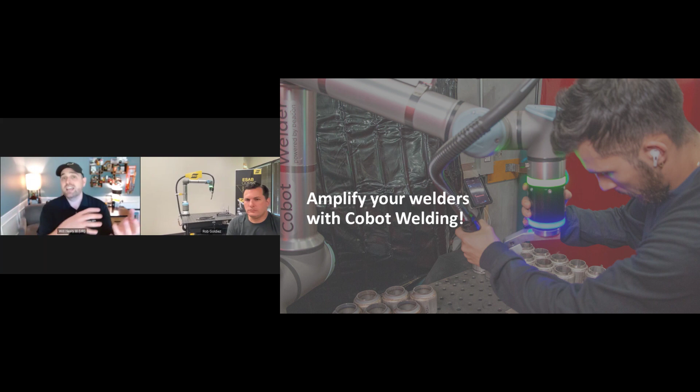So what can we do to beat this kind of chaos in production welding - from not having enough people and having to turn away business, the job being pretty physical and challenging, and just having shortages in total? It really comes down to, how can you amplify your welders? And you can do it with Cobot Welding. Cobot Welding has this really interesting opportunity as a tool for welders to boost their productivity, and to help focus them on work that they want to do.

Welders want to solve problems. They want to do creative things. And those 200 straight-line 6-inch welds, those are things that a cobot does very well. That allows your welder to focus on prepping the next part, doing a quality inspection, or doing a more complex weld that maybe you want the welder doing, while the cobot does some of the other welds that are more boring. This can amplify the welders in their productivity. It can boost the consistency of how many parts you make per shift. There's a lot of opportunities for how we can do that with collaborative welding.

So what is in a solution? We're going to show you, and Rob's going to demonstrate live for you in a couple minutes, what the Hirebotics collaborative welding system looks like and how it works. But there are basically four main components inside a system to make it work: the cobots, the universal robot you see there; the work area where it's going to work, along with the tooling and fixtures required to make that happen; and then the dress-out kit with the torch, the pipe, the wire feeder, the power source, and all those kinds of pieces to make the robot into a welder.

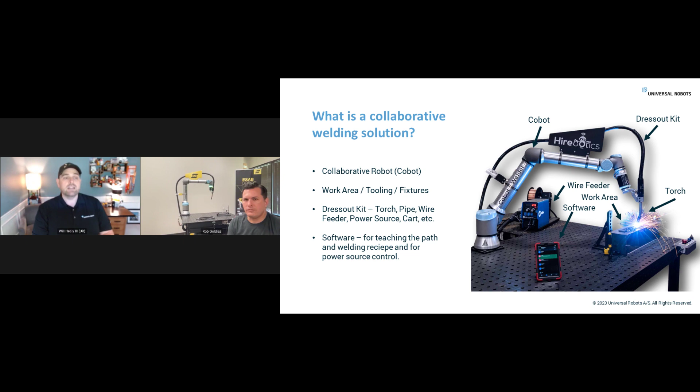When we look at what collaborative welding is doing, it's a valuable tool that's amplifying your welders and expanding their productivity. We see time and time again, it raises the arc time per shift 2x, 4x, 10x. We have some case studies we're going to talk about in a minute.

We drive production consistency, improving the product quality, reducing the grinding and rework queues. No one shows up to work thinking, I want to grind parts today. And then, transferring those dull repetitive tasks to the cobot, making it more predictable for you.

And this is really valuable - it increases welder engagement and retention, and we see that a lot in the stories. It reduces the physical demands, reduces the exposure to hazards like smoke and fumes coming out of the welding process, and it focuses the welder on the creative and challenging tasks, keeping them more engaged. That's going to help you retain more welders.

We've always embraced new tools in work. Look at anybody who's assembled an IKEA system. If you're using a little wrench, that's really torturous. When you have to put together 200 screws by hand with a little wrench, you get calluses on your fingers and you're just really tired and it's draining.

So we have screwdrivers, torque guns, and Ethernet controllable torque guns - we've invested in technology over time in our processes to make it easier for the worker, to make the worker more efficient, to help the quality of the installation and get the right torque rating on the assembly. We have always embraced new tools in work, and this is a new tool for you to really amplify your welders and help them be more productive and drive engagement with them.

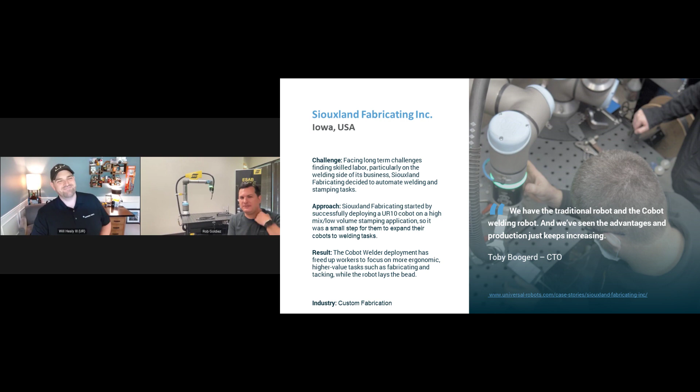Yeah, and for them too, floor space is always a constraint in any manufacturing facility. Their parts are tabletop size, maybe a little bit bigger, but if you're trying to do those parts on traditional robots, you've got a lot of floor space, a lot of caging and things like that to deal with. You can fit a lot more collaborative systems into the same floor space that you can fit a traditional system. Oh, great point, I didn't even think of that.

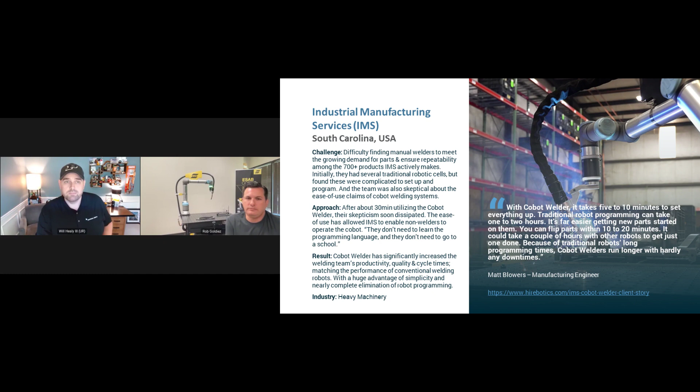Okay, Athena Manufacturing out of Texas. Yep, Athena Manufacturing down in Austin, Texas. They supply into a lot of different industries, but the semiconductor industry is one of their big ones. And the semiconductor industry, as we all know with the CHIPS Act and stuff like that, with the reshoring, has driven a ton of capital investment into establishing these fab sites in the US. So Athena's business has been growing.

They have traditional robots doing traditional welding and sanding and other applications. They even have cobots doing other applications. But when it comes to welding and the effort to get welding productive, having a partner that has software that makes it easy to use was key.

So Athena, another customer, they started with one. They started to bid on more jobs and more opportunities beyond what their single cobot could do. Now they have 4 systems. They have external positioners that they've helped design and incorporate into the system to do very large parts with 2 robots, and a lot of smaller parts as well.

This is a great example of they were turning away business because they didn't have enough welders and they weren't able to do it. And what I really thought was interesting is because of how easy the solution is, they were able to take people who didn't even know welding, that didn't know how to use a robot, and teach them as operators to operate the system and produce parts. So they were able to actually make more parts and accept more business because of this investment. And I thought that was really interesting.

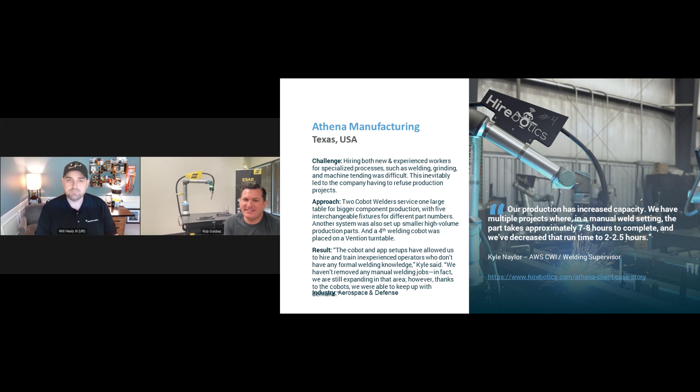And so as companies globally evaluate how do they solve their labor challenges, cobot welding continues to pop up. And our strong belief is that ease of use will drive the day, because a lot of these customers are first-time automation users, and first-time automation users are trying to de-risk what their investment is.

And the best way to do that is through an easy-to-use system. You're going to see in a few minutes, as Will mentioned, I'm going to share a screen, and we're going to teach some parts so you can see how easy it is. Everybody throws around ease of use. It's very easy to just say, oh, we've got an easy-to-use system. Traditional robot companies do it, and then you watch videos, and it's very complicated. Very few companies actually show you what it takes to set up a part, go through the process of teaching it, tweaking it, and we're going to do that today.

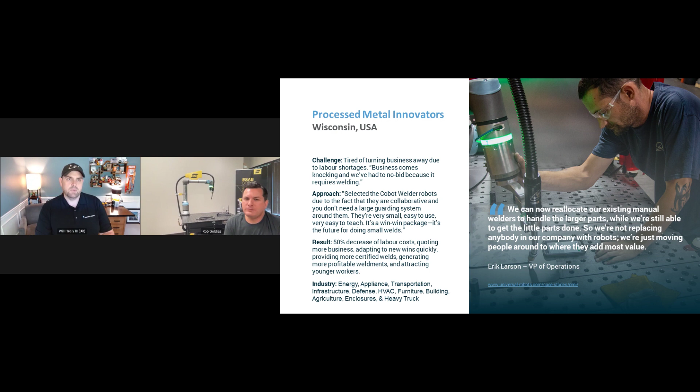Skyvington is a great case study with our partners at ESAB. It's a Canadian company, and they were looking into Cobot welding. They struggled. The story for all of these is the same: we cannot find people to weld the parts we need to weld, we cannot find and keep skilled welders. That's where it starts, that's the entry point, and they get all these other benefits. Skyvington was literally tens of thousands of parts behind on a job they were doing for one of their customers. When they got introduced to the ESAB Cobot, the version of our system you see behind me, they literally took it that day. They asked for that demo system, and the next day it showed up on their site. It wasn't the one they were buying, but they said, I need this. Over the course of that next 30 days, they produced all the parts they needed. They got caught up on a job they were prepared to tell their customer they were behind on. They're just emphatically happy and love it, how productive, how easy it was for them to be productive so quickly. I think that's a great story.

And the weld quality is going to be important to folks like this because they're making retail displays and store fixtures. So these are things that are going out in the commercial space where people in society are seeing it, and so the look is going to matter on those kinds of products. I'm sure that got them excited too, that the quality was going to be there that they were looking for.

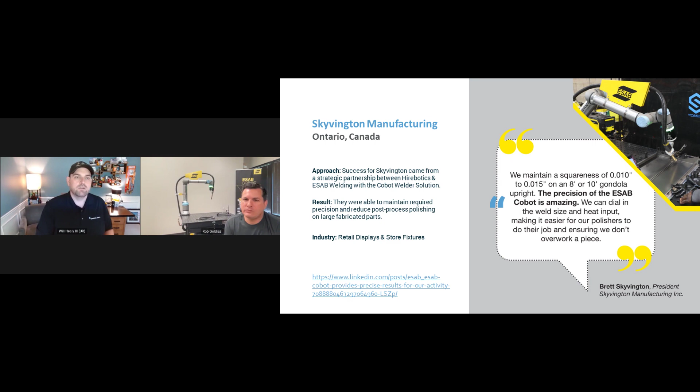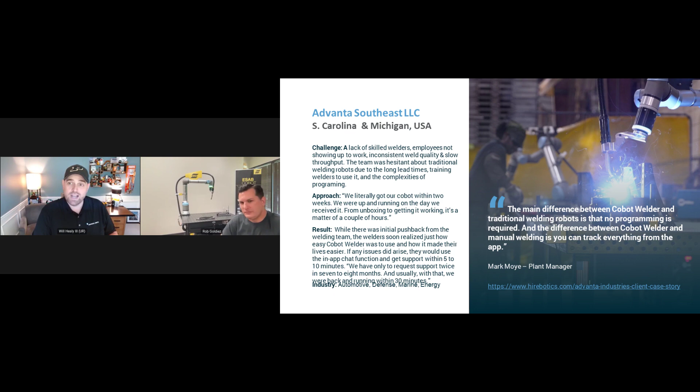Thanks, Will. One of the things I want to say - Will's presentation led up to this - this shortage of skilled welders has been going on for a long time. I remember a 1998 American Welding Society study that highlighted one of the concerns manufacturers had in the 90s was the shortage of skilled welders, the aging workforce, all the same themes. I point this out only because robots have been around for a long time. Cobots are newer to the scene, but these problems haven't been solved. The traditional method of solving these problems hasn't worked - the problem exists today and it's only gotten worse.

So what you're going to see here - I'm going to share the screen so you can watch what I'm doing. You're going to see me teach some parts. We've got a little sample over here where we'll do a live demo. Most of the time we don't even weld in these demos, because people understand that with ESAB or Miller or whatever power source they get with our system, they know how to join metal. This is really a story about how easy the software is to use and can I empower my people with it. It's one thing to watch a video on YouTube of a robot doing something, but the real story is how did you make it do that? How did the software enable someone to do that? So we're going to walk through that now.

Okay, hopefully you can see my video - I'm going to share a tablet that I have. Just as a quick background, our software, we develop it in-house. It runs on iOS devices - I've got an iPad mini here, Android, web. You bring your own technology, whatever your welders are comfortable with. This is the first layer of breaking down the barriers.

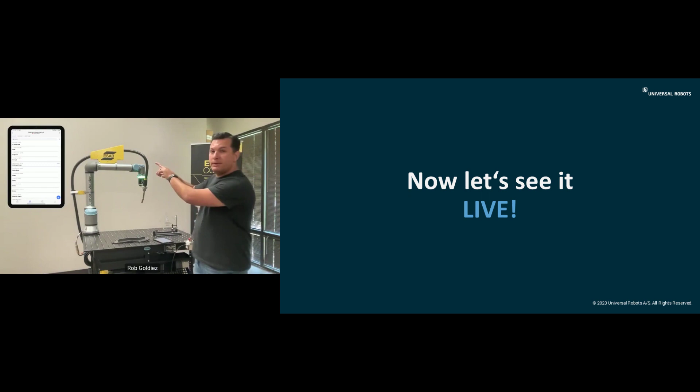A few things I'll point out as I run through this demo. Across the bottom we can see a few different tabs. I've got a home tab. Customers can see these are on some demo robots, but they can create their own charts and chart cycle time and consumables used, and all sorts of things like that, whatever's important to them. We're looking at this on an iPad, but some customers put a big screen up in their shop. Maybe the owner wants to monitor things from home. They've got the flexibility to do that.

We're going to spend our time on the robot tab, where we have several different robots here. We're using the ESAB demo, so I'm going into that screen right now to see all the different parts that we taught. We're going to teach a new part here.

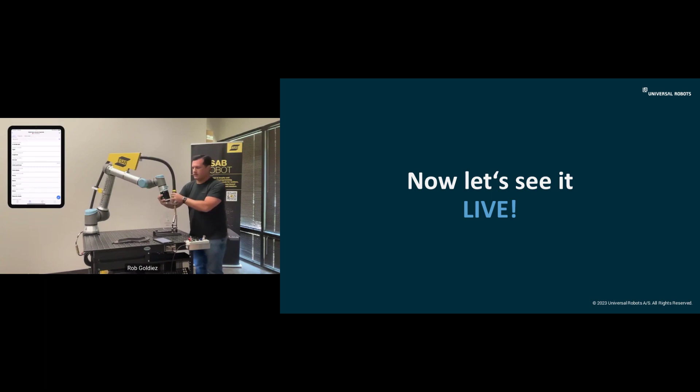A few things I'll point out, especially if you're new to collaborative robots. This is safe to be around. I can walk up to it. I can move the robot around by pressing a button on the back side of what we call the puck. There are two buttons here. The top one, when I press it, allows me to hand guide the robot. So welders could do the same thing I'm doing and move the robot into position.

And the bottom button is going to interact with the software. All motion is always initiated from this button box, or operator box, that's wired into the robot with an e-stop, a play button, and an arc on/off switch. So we're just going to go through and teach a part that I've got set up like this. It's got a few different pieces of geometry to it, and we'll go through and teach it.

So I'm going to hit the blue circle button in the bottom right. I'm going to give this part a name. This is typically the hardest part of the demo — what do I call this part? But a customer would give it a part number or drawing number, something they'd want to recall it by later. We'll just call it webinar.

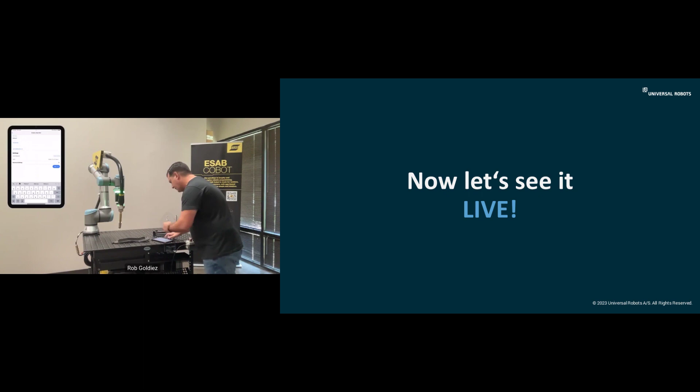I'm using the 22-degree short gooseneck, so I set that up. Now, if a customer has saved weld procedures into a library, you can easily pick some settings from a library. I'll just say use these settings — those are my defaults. And now we're ready to teach welds.

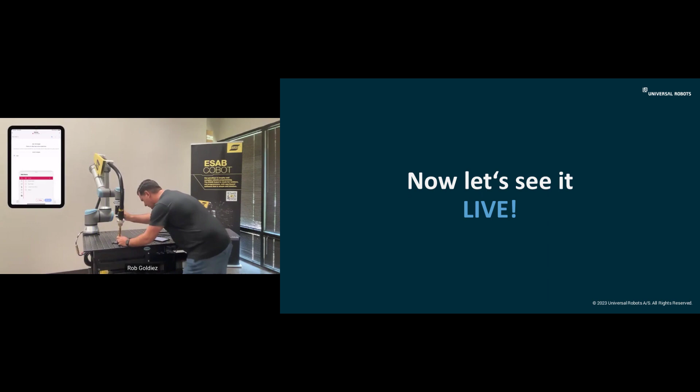Now the data shows that most people are teaching linear welds and air moves, so we prompt the user to start with linear welds. You can always change it to a different type of motion. But we're now going to hit the button and bring the robot into position, and click the blue button to teach our first point.

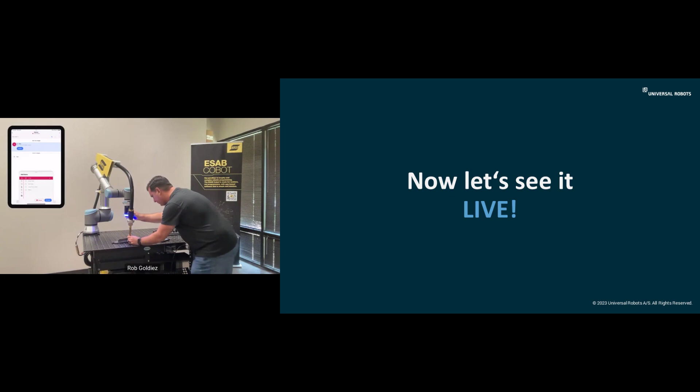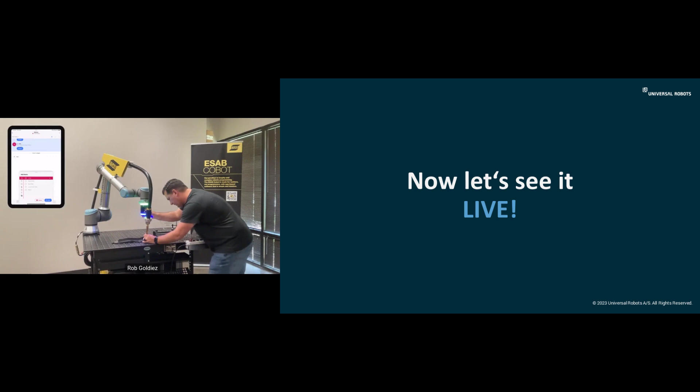So I just taught my first linear weld just by clicking that blue button. I'm going to move it to the next point, click the blue button to teach my next position. I'm going to move it to the bottom here, teach my next position, and then the last point here. Now I haven't taught any air moves, I haven't taught approach points — the software figures all that out on its own. We can always add that later if we need to, but I'm going to hit save.

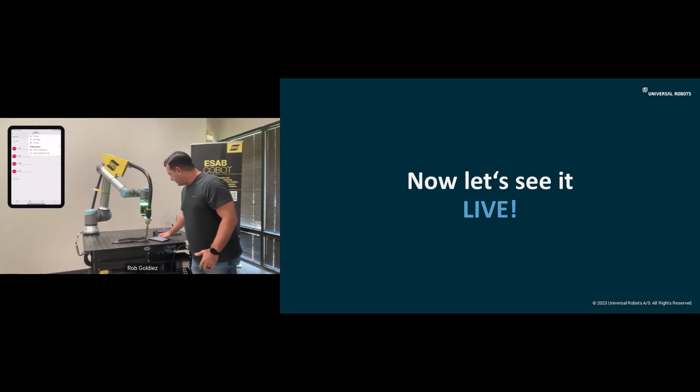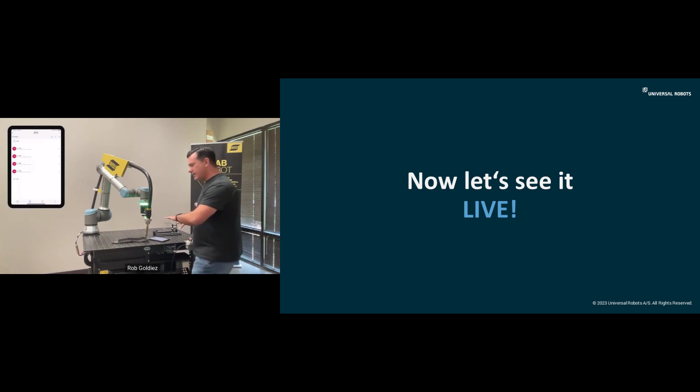Now, similar to Apple Music and Spotify, we have a concept called a playlist. What's on the playlist is what the robot's going to run when we press play. You can have one part on your playlist like I just taught here, and I'm going to create a playlist with this part. But you can teach parts independently, throw them onto a playlist just like songs in a music app, and run different parts sequentially — an A side, B side, or three different parts if you want. So we've taught this to run, we told the robot we want to run it. The arc is off, we're not trying to weld this part here. I'm going to press play, and we'll see it cycle through this.

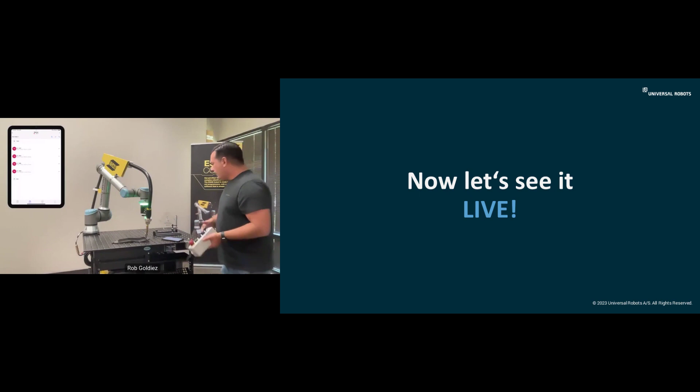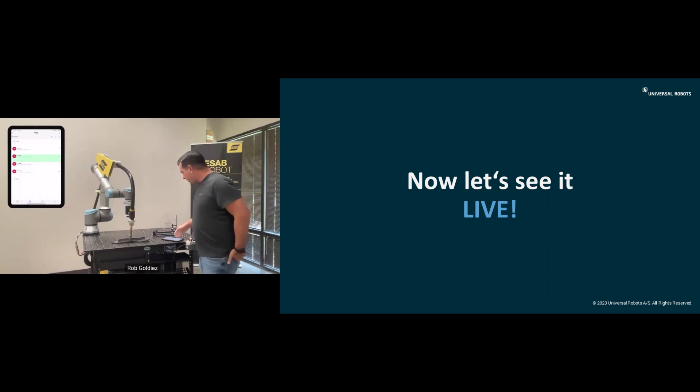Now the speed at which it's traveling, the torch angles that I gave it, are all what I kind of hand guided it to. The travel speed is in those settings that I had when I chose that library setting. And it's going through the different points right now, which we can follow along in the software. Now, as it's going through that, I'll point out a few different things in the interest of time.

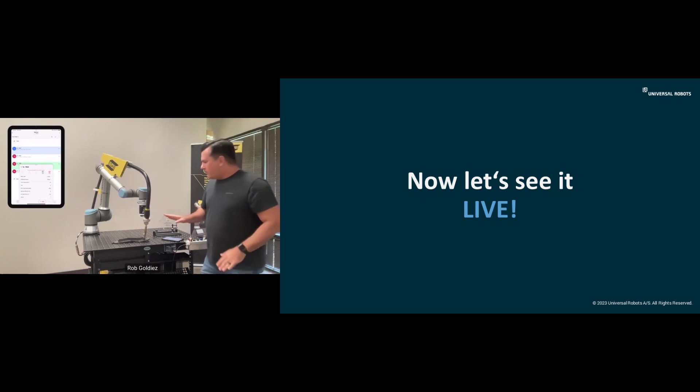On any of these points, we can tap on it and see the weld procedure for those points. We're in a pulse process. We've got a 22 inch per minute travel speed. Trim is set to 0, wire feed speed 400. For any taught point, we can go through and tweak those settings.

Now it departed the weld and went to its default home position. I can make this more sophisticated by tapping the magic wand, hitting plus to teach some more points at the end.

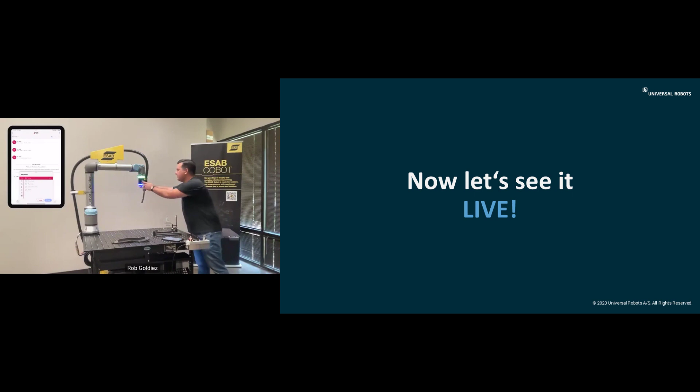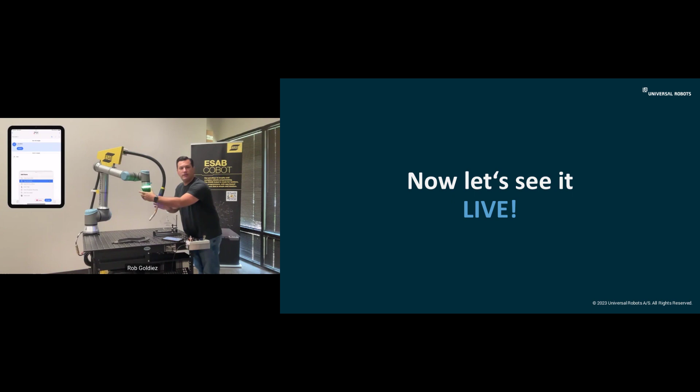Maybe I need to have an air move here because I need to weld the backside of the part next. So I can switch to air move just by pressing and holding the blue button. It lets me toggle the air move, and we just taught an air move. I can toggle back and teach points on the backside.

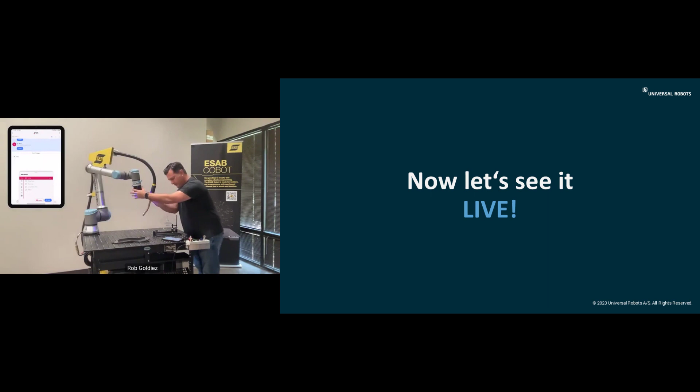We'll just do that for now, and we'll hit save. So very easily, I can add to my part. I can teach a much more complicated part.

I can press and hold one of the icons because I want to skip part of the weld and just have it go from there. Go to the air move and do the backside. Notice again, it'll depart the weld and go to its home position. So very easy to interact with this.

We're running this on an iPad and it's going to go home. So now I'll answer the question that people always ask: I got to see it weld, I got to see it spark. So we're going to teach a little part over here.

We've got just a little lap joint. So I'm going to go back and teach a new part. We'll see how I do here. I'll say webinar 2. Hit next, choose those same settings.

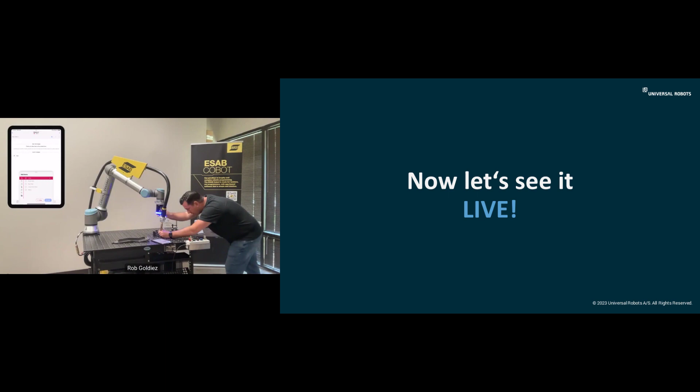So now I'm going to come in here. I will teach my first point. I'll come over and teach my second point. We can do a dry run if we want to see it again.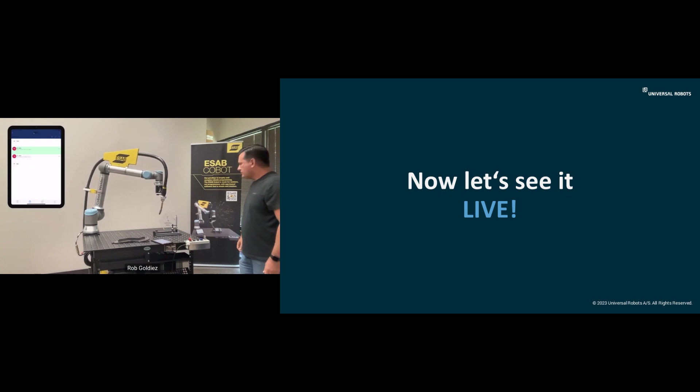We can even do something we call step mode. So if we want to go step by step, it stops at the points and I can look at where the torch is. If I wanted to make any changes, I can move the robot around from this point. I could recapture that point if I needed to make any adjustment, but if I'm happy with it, I can play it through step by step.

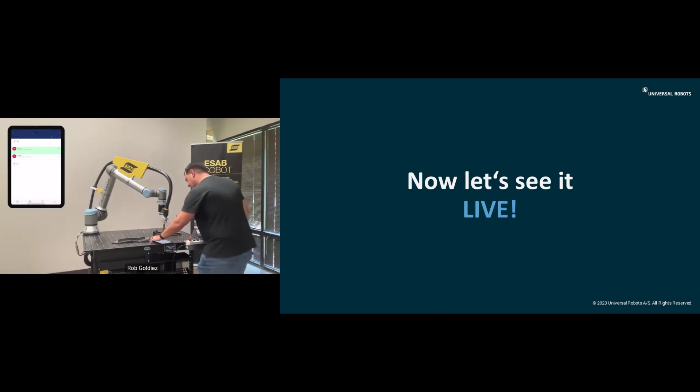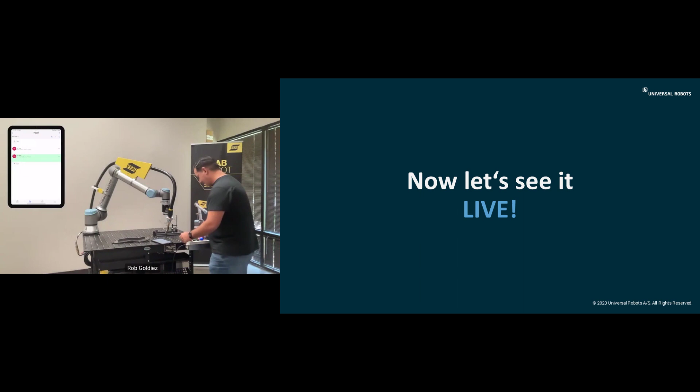But we want to see it weld, because people want to see: can the welding cobots join material? They can, I promise. It'll go home. So now I'm going to move out of the way, get into a safe area behind a screen. I've got the operator box over here. I'm going to turn the key switch on.

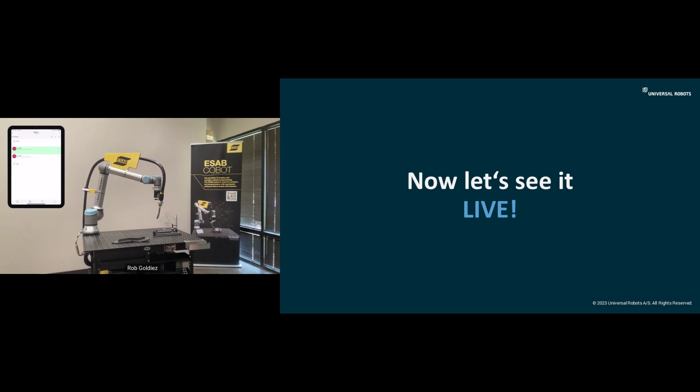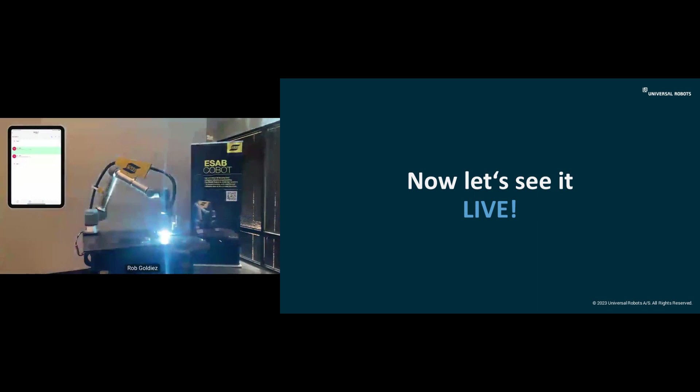And we're going to hit the play button to see it weld. So pretty easy to run the system.

A few other things I'll point out real quick, and then we'll get to some Q&A. I mentioned this earlier: customers sometimes have questions, they want to reach out. Different than any other system out there, they can drag it open to the side.

They can hit support. Within support, can we see this? I think we can see this. I can see it now. In there, we can search knowledge articles, and we can reach out and ask questions by sending a message in.

We're really proud of this, but if you have any questions, you can reach out, and in under 2 minutes you're going to hear from us. So very fast response time when you have questions and want to reach out to a human and get some answers. So with that, Will, we can open it up to questions.

Thanks for that demo, Rob. That was really amazing. I think what's incredible is how quickly you taught two parts with three different paths in like 14 minutes, more or less. And you were actually live welding a part there. I think the power of this is being able to go through and set that up, and if you have consistent standard setups that you normally use, certain speeds and gas mixtures, you can have all those preloaded there, so it's even faster. That's what you were showing at the beginning.

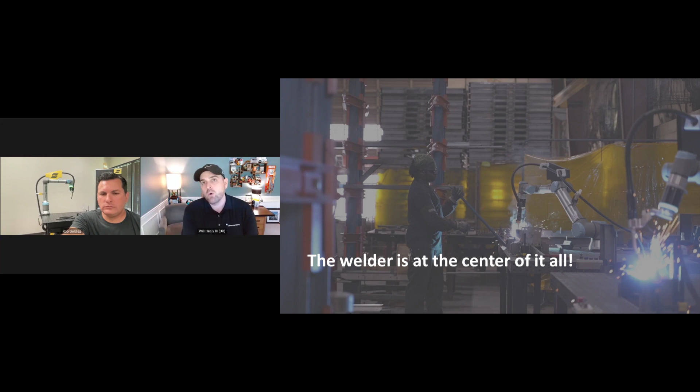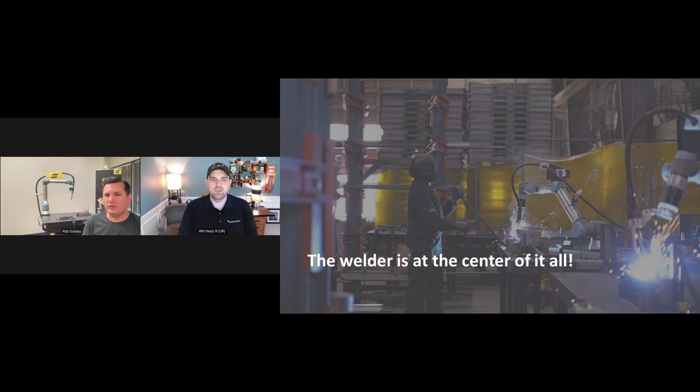I love this picture here. I forget which company this is from, Rob, but this is one person operating two robots at the same time. That's Advanta, two of their systems, one of their welders. No experience with automation, but he can load and go on multiple systems. That is awesome, really powerful. I think that's a really powerful part of this, it's enabling that welder to run two arcs at the same time. How many welders can hold two torches at the same time and do welds, and what's the quality of those welds when they do it?

When we talk to experienced welders, when we interview them, one of the biggest things I hear is this extends their career. People who are so tired and exhausted, they don't think they can do it anymore. You still need welders, but you don't want them to retire. This is an investment to keep them around for three, five, ten more years because they don't have to do the physical parts of the job. It can help extend their careers, push out their retirements a little bit, and help you keep your productivity levels without losing that welder because they can't do the physical parts of the job anymore.

Experienced welders tell us things like it gives them more energy and better work-life balance. It produces at their quality expectations and what they expect to be done, and it's their work when they're teaching the robot to do this. It allows them to focus on more creative and more challenging work, not just doing 200 pieces of a 6-inch straight line weld.

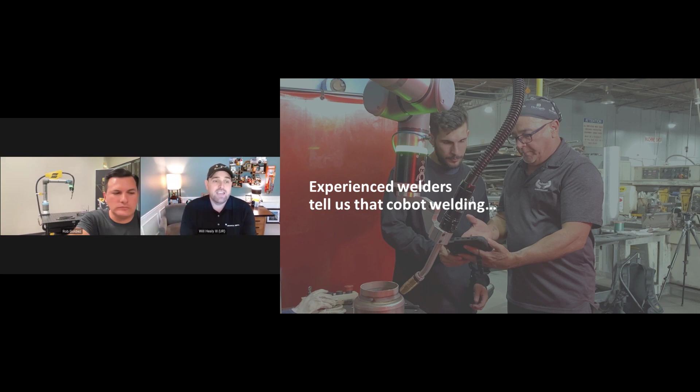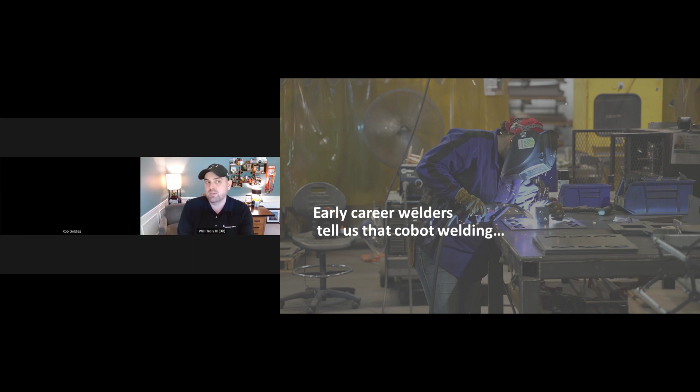When we talk to early career welders, people new to welding, this stops all the mindless welds, those 200 pieces or 2,000 pieces of a 6-inch straight line. Young welders usually get the less interesting jobs, so it gets rid of that kind of mindless work. They also aren't doing as much over-welding, so they don't have to do as much grinding. It empowers them to feel like they're contributing more to the organization and responsible for more. I run robots, I run welding robots, and I teach welding robots. It allows them to have that feel of more responsibility that young people are always looking for in organizations.

When we talk to business leaders, there's lots of interesting things they tell us: reducing the impact of the skill shortage, better planning of production levels, being more consistent day to day, and knowing how much arc time they'll have each day. It reduces operator fatigue and potential chances for injury, and it reduces waste, which is a big deal, and eliminates post-weld grinding. No one wants to grind anything, so if there's an opportunity to reduce or eliminate that, it's there. Business leaders go on to tell us all kinds of things, like it removes bottlenecks.

A lot of times the weld shop is the bottleneck, or it fills gaps where they have traditional robots, they have manual welding, but sometimes it doesn't make sense to set up on the traditional robot, and they wish they had something better than having a manual welder weld 2,000 of the same parts. It fits that really nice gap.

We hear over and over again that this implements really fast with a strong return on investment calculation at an affordable price for shops of all sizes. Ultimately, it enables you to be productive even when you have open welder positions, and all of us have open welder positions right now, and it helps your company boost productivity and profitability.

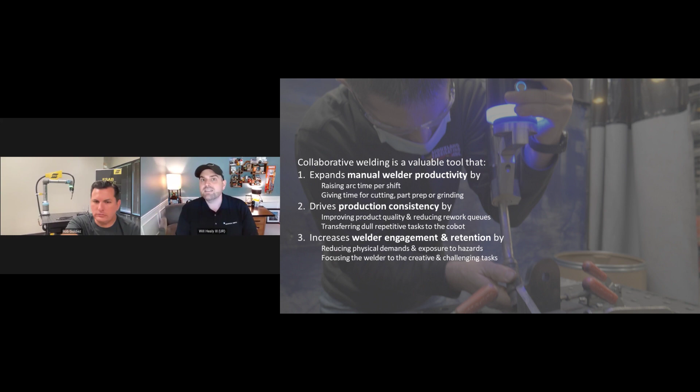So just a refresher, collaborative welding is a tool augmenting your welders that expands manual welder productivity. It raises the arc time, drives production consistency and predictability of the weld shop output, as well as the quality of the welds, and it increases welder engagement and retention, even attracting welders to your shop.

And so Hirebotics, Rob's with Hirebotics, is really trying to make welding cobots easy, so you don't need experts, you don't need robotics people to do it. They are the industry's first welding cobot with this intuitive smartphone and tablet app that you saw today.

Really cool. And they make a commitment on their site: industrial grade welding cobot systems shipped within 2 weeks and running parts in hours. You heard that over and over again in the stories we were talking about.

And the 2 minutes of response time through the app is just incredible, Rob. You're able to help people get running quickly.

That's really powerful. Yeah, it's one of those things we tell people, like you just mentioned, Will. The first time they have a question, it could be, where does this go? Or how do I set this up? Or how do I do radial welds? They just get blown away that they get answers in minutes, not hours, not tomorrow, not 30 minutes, just answers right there, right away.

And Universal Robots, I've got to talk about it. UR is really the market leader for collaborative welding. We are on our 5th generation of Cobot, and we are actively doing welding-centric developments for the Cobot, which is really unique in the Cobot space. There are many Cobots out there, but UR has had a lot of experience in this.

Rob mentioned collaborative welding is not new. We have more than 5+ years experience. You heard 2018 from Rob, so it's really a long time, and this is more than any other robot company. Most other Cobots have entered this space only in the last year, so we have a lot of experience.

That means we have 50+ local partners and integrators available around the world. Hirebotics is expanding their reach and availability, even through the ESAB network. And then there's hundreds of years of welding experience in our community, as well as many partners offering components to go nearby, like maybe another Cobot for loading the cell with a gripper or something.

And then we have thousands of successfully deployed Cobot welders around the world in virtually every country, and in many different industries and applications, from semiconductor to automotive to mobile equipment and even food and food equipment. So there's a lot of really interesting places where our Cobot has ended up. And UR is an organization, we want to create this world where people work with robots, not like robots.